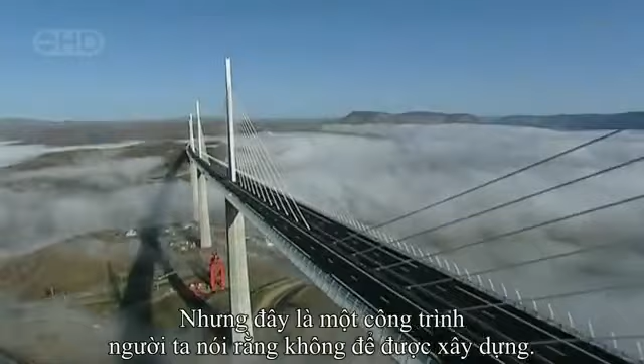This is the Millau Viaduct, the tallest bridge in the world. Its highest tower stretches a staggering 343 meters. So high, the bridge glides above the clouds. But this is a megastructure they said couldn't be built. When I've shown first the drawing of this bridge, they really thought I was crazy.

The team attempting to build this amazing freeway in the sky had to survive landslides, fight winds gusting at 130 kilometers an hour, and weather massive storms as the bridge simply hung in the balance. It's a bridge that pushes the boundaries of engineering to the limits, and then beyond.

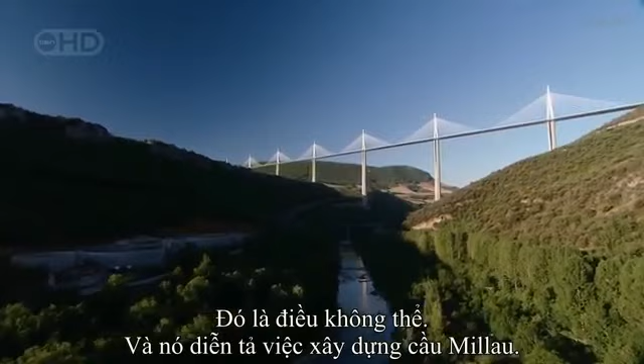Imagine building a series of Eiffel Towers, then slinging a 4-lane highway between them, all the way across one of the deepest valleys in France. Impossible though it sounds, that pretty much describes the building of the Millau Viaduct.

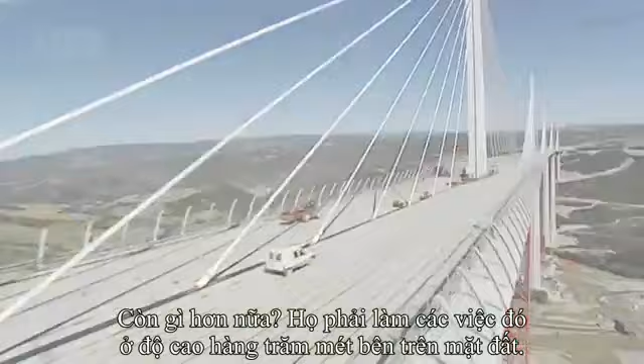From the start, the construction team faced 3 daunting challenges. 1. Build the tallest bridge piers in the world. 2. Put a 36,000-ton freeway on top of them. And 3. Erect 7 steel pylons, each weighing 700 tons. And what's more, they had to do this hundreds of meters above solid ground. So high that if you were on top of the Eiffel Tower, you'd still be looking up at this awesome bridge.

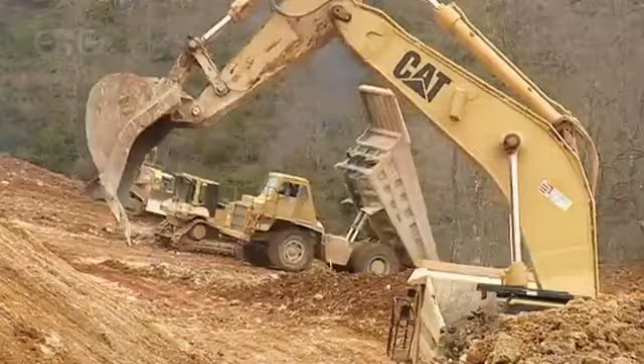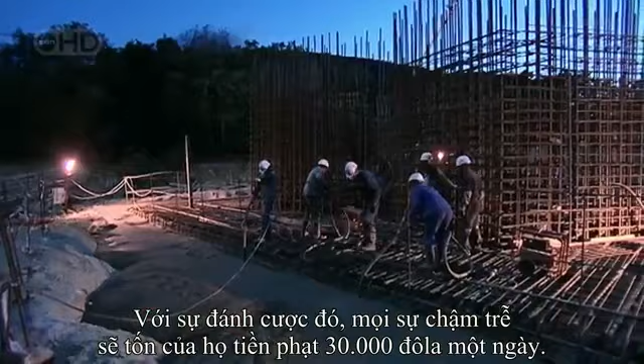October 2001, the team break ground. They're required to build a bridge that'll last for 120 years. And to win the contract, the teams promised to build it in record time, less than 4 years. By comparison, the world's longest suspension bridge, the Akashi Kaikyo in Japan, took a full 10 years to build. To up the ante, any delay will cost them $30,000 a day in penalties.

There are 7 piers that are numbered from the northern end of the valley. Number 1 will pose problems because of the steep slope. Number 2 will be the biggest challenge since it's the tallest. Crossing the river, number 3 is not much shorter. Then 4, 5, 6, and 7 climb the gentler slope to the south.

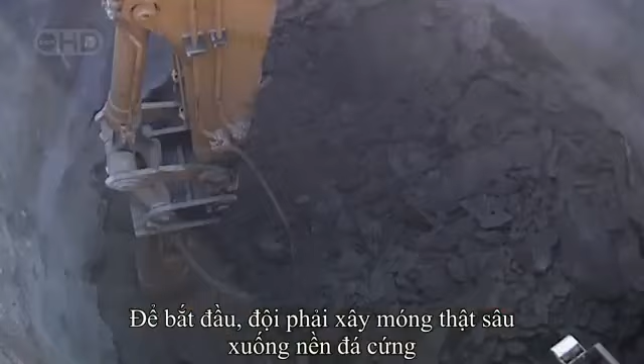To begin, the team had to bury the foundations deep in the bedrock in order to support the enormous weight the bridge will place on them. But the forces of nature were stacked against them. Geologists have warned of the risks posed by the region's fractured limestone. The rock is full of cavities that are essential to the local cheese economy. These cave systems, close to Millau, are home to a unique bacteria responsible for the blue mold in the world-famous Roquefort cheese. But what's perfect for cheese could be disastrous for a megastructure.

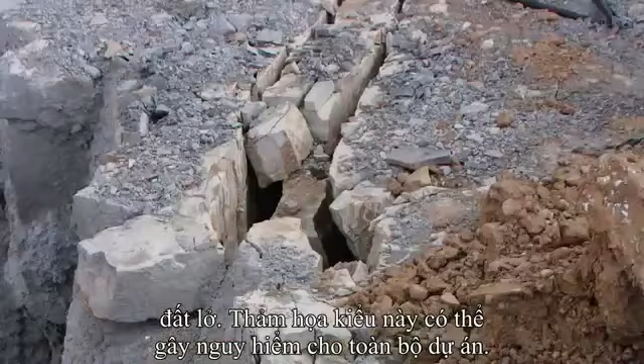The geologist's diagnosis spelt one thing: landslides. This kind of catastrophe could jeopardize the entire project. Despite the warnings, building went ahead as planned. Then, well into construction, as predicted, a dramatic storm causes a landslide. 4,000 cubic meters of rock collapse around Pier 1. Fortunately, the fallen rock doesn't damage the pier, but the warning is clear. They're forced to divert precious manpower and equipment to stabilize the slope and prevent a repeat collapse.

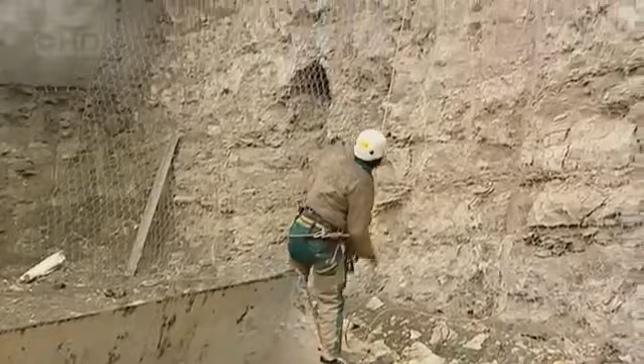So if the area is prone to landslides, why did they build the world's tallest bridge here in the first place? The answer is simple. In the 1980s, France built a freeway linking Paris directly with Spain. This major artery headed south across the French countryside, while from the Mediterranean, the freeway headed north, until they both hit one of the deepest valleys in France and stopped dead.

Welcome to Millau, France's least favorite bottleneck. The town of Millau is in the mountainous region of the Massif Central, one of the most tranquil parts of France. But in summer, this poor medieval town suffered traffic hell. The locals couldn't take it anymore. Neither could their mayor. It was terrible for our reputation. When you hear every day on the television and radio, avoid Millau, there's a traffic backup, a 5-hour wait in Millau.

And it's not just the people of Millau. Two drivers, Jamila and Jemima, crossing the 30-odd kilometers between the freeway on either side of Millau, reveal exactly why this bridge is needed. Jamila, in car 33, will cross the new bridge, while in car 22, Jemima will take the old road across the valley floor. Getting straight on the freeway, car 33 approaches the Millau Bridge after just 18 minutes. The only delay is the 30 seconds it takes to get through the toll booth. Then driving at 100 kilometers an hour over the spectacular bridge, she takes just 32 minutes to get to the other side.

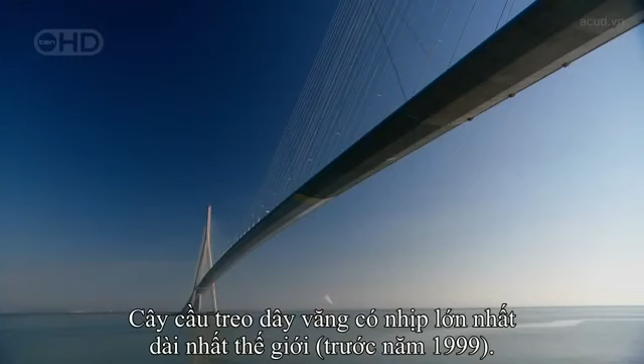12 years before construction began, up in Paris, the Ministry of Transport first came up with a plan. Their head bridge builder, Michel Virlogeux, is no ordinary engineer. He's a man who thinks big, very big. Like the Normandy Bridge in northern France, the longest cable-stayed span in the world. With this record-breaking structure completed, Virlogeux was on to his next, Millau. His plan, another cable-stay bridge, but pushing the technology beyond anything previously attempted, with piers 4 times higher than the Normandy Bridge.

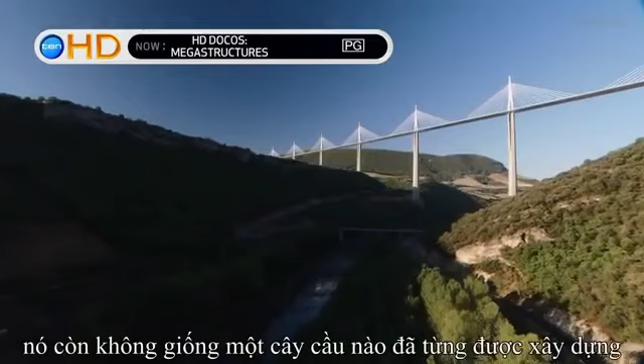The Millau Bridge would not only be the world's tallest, it would be unlike any bridge ever constructed. When I first showed the drawing of this bridge to the governing authorities, they really thought I was crazy. Virlogeux's Normandy Bridge has 2 sets of cables supporting the deck. But he wanted to up the stakes for Millau by losing 1 row of cables, so the remaining line would be forced to do twice the work.

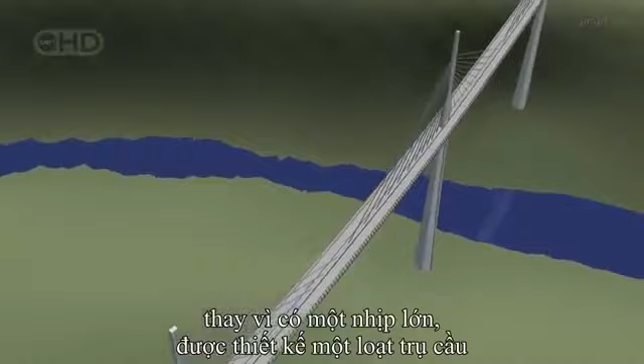More dramatically, the 2.5-kilometer Millau Bridge, instead of having a single main span, needed a whole series of piers to support it across the valley. No bridge builders had ever attempted a multiple-span, single-line cable-stay bridge on this scale before.

The French authorities had a problem. Nervous about Virlogeux's groundbreaking scheme, they held a competition inviting other engineers and architects to compete with different designs. The winner, Lord Norman Foster, is one of the world's superstar architects. In Hong Kong, he built the world's largest airport terminal. In Barcelona, offices literally hang from a mast on his communications tower. This is a man who regularly contemplates the impossible and delivers.

You know, it's the challenges, and it's one challenge on top of another, on top of another. And with Millau, one of the biggest challenges was making it fit into the landscape, given it's just down the road from the famous Gorge du Tarn, France's equivalent of the Grand Canyon. How do you make something which has to be so immensely strong against the forces of nature look very gentle, very delicate? How do you weave something on that scale into the most unbelievable landscape?

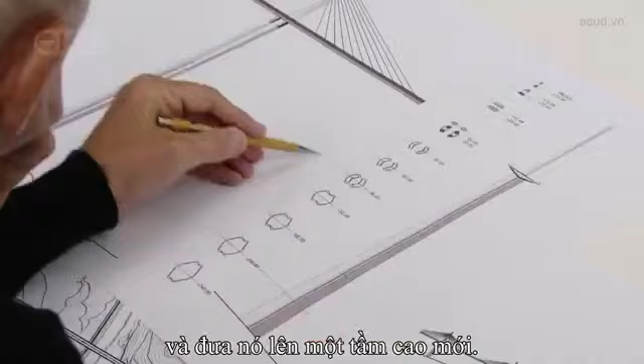Ironically, Foster's answer was to take Virlogeux's pioneering scheme, then push it one stage further. He turned an elegant piece of engineering into a delicate work of art by boldly cutting out 2 of the 9 original piers and seriously slimming down the remaining piers and road deck. Foster wanted the bridge to appear as delicate as a butterfly, but this butterfly has to support the weight of 5 Eiffel Towers in gale-force winds hundreds of meters above the River Tarn. Getting the design wrong would be a disaster.

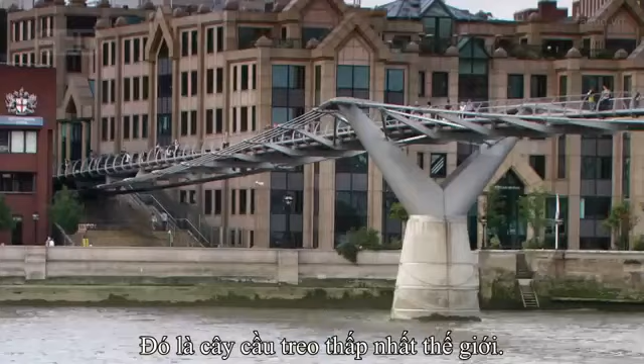Then, with Millau still on the drawing board, Foster's record as a bridge builder suffered a major setback. His Millennium Bridge in London is actually another record-breaking structure, the lowest profile suspension bridge in the world. But when this footbridge opened to the public in June 2000, it was a public relations disaster. Crowds walking over it set up a resonant frequency, and the bridge began to sway. As people adjusted their step to the small initial wobble, the effect was magnified.

Though it didn't threaten the structure, the swinging motion became so dramatic, the authorities closed the bridge for a refit that took 1.5 years and ended up costing over $8 million. It was a bad omen for the Millau Bridge, where construction was soon to begin. And at 15 times the height, a design flaw would be a catastrophe.

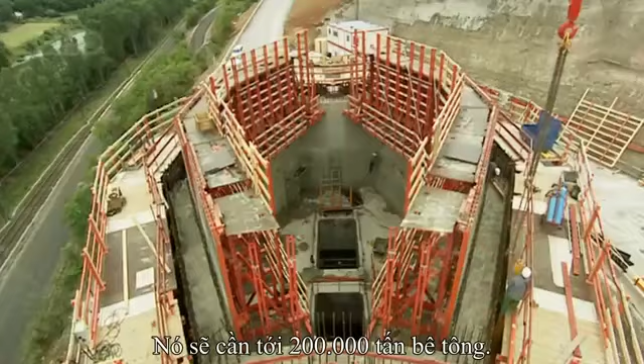December 2001, France's Millau Viaduct, the tallest bridge in the world, is under construction. Everything about this project is supersized. It'll need 200,000 tons of concrete, so much that the team have to build a concrete factory on site. But there's nothing straightforward about this concrete. The formula must be just right. It needs structural strength to support the massive loads it'll have to bear. But it can't set too quickly, as it has to be hoisted into position and poured hundreds of meters in the air. And it needs to be just the right color to suit Norman Foster's vision.

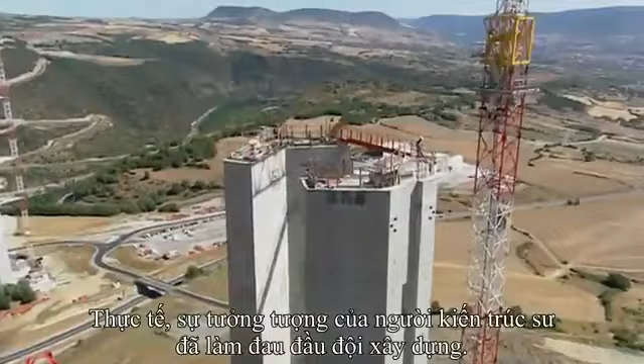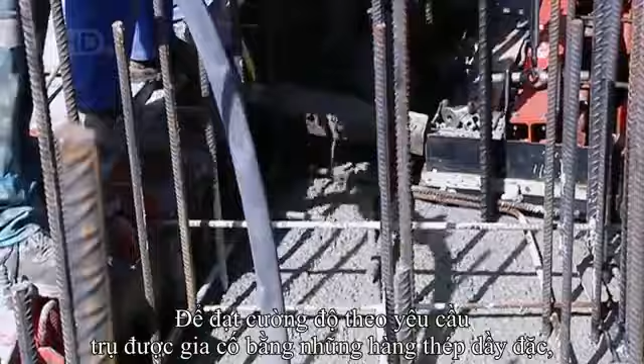In fact, the architect's vision has created a headache for the construction team. He's designed each pier as a complicated geometric shape, tapering the entire way up with vertical grooves set into them to create shadows. But what's just a line on paper for the architect was a major challenge to build. The enormous piers are built step by step by pouring concrete into a temporary mold. To give the required strength, the molds are filled with a frame of steel reinforcing bars. In total, 16,000 tons of these steel bars are hoisted into place and secured. Laid end to end, they'd stretch the 4,000 kilometers from Millau all the way to Central Africa.

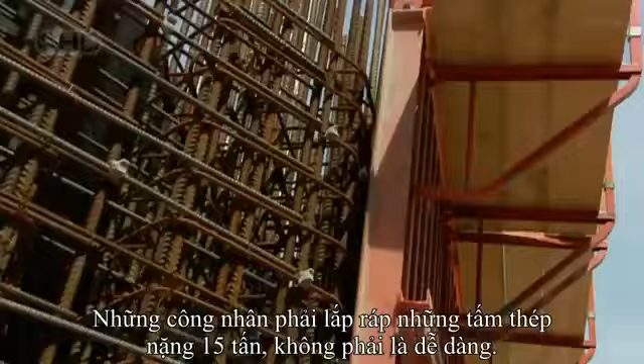The shape of each pier is seriously complicated. As a result, each time they remove the sections of red steel shuttering, they have to change the shape of the mold to fit the profile of the next 4-meter section. Manhandling these steel panels, weighing up to 15 tons apiece, is no picnic. And with the combined height of the 7 piers totaling well over a kilometer, they have to change the shape of the mold over 250 times.

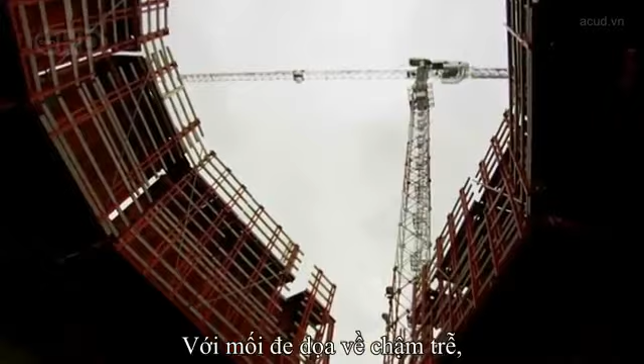Every 3 days, each team on each pier went through this whole cycle. Then they repeated the process. But it was a race against time, with a permanent threat of delay. Keeping the entire build on time and to budget was the daunting responsibility of one man, Jean-Pierre Martin.

If instead of 3 days we took 4, imagine that multiplied by the number of castings. We'd end up with a 3 to 6 month delay. With a penalty of nearly $1 million a month, this isn't something Martin wanted to contemplate. And this schedule wasn't his only headache.

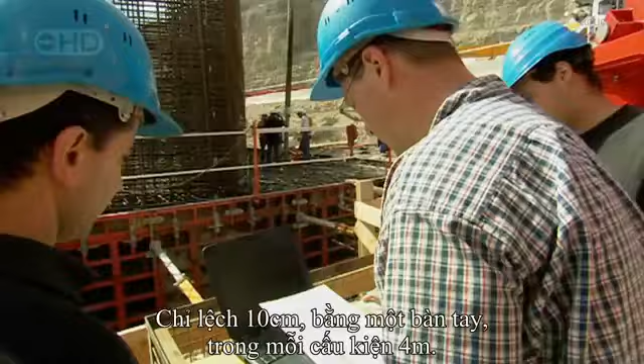You have to be pinpoint accurate when you're building the tallest bridge piers in the world. Get it wrong, and the bridge simply won't fit together. Just 10 centimeters out, about a hand's width on each 4-meter section, and the tallest pier could be 6 meters off at the top, the width of a jumbo jet fuselage.

Each team was aiming for a specific point in the sky. For Pier 2, this was exactly 245 meters above the ground, 546 meters from the north side, and 1,914 meters from the southern end. There was no room for error.

The only chance they had to get it right was with GPS, accurate to within 4 millimeters. Using signals from multiple satellites, the team could pinpoint their position and make sure they're on target for that critical point in the sky they needed to hit.

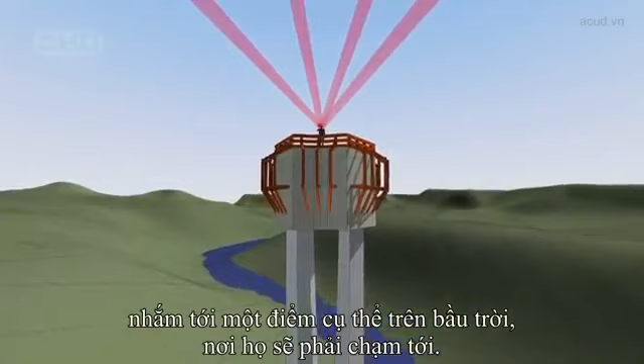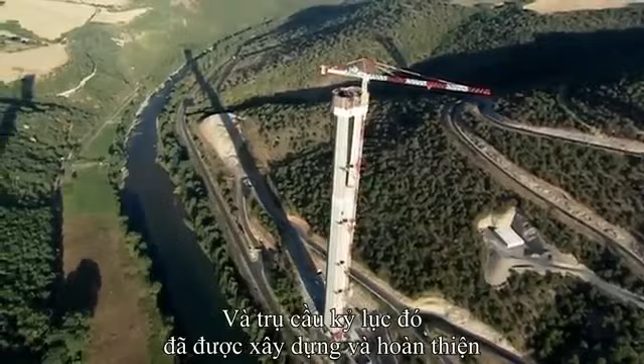Month after month, the piers climbed higher. Finally, by November 2003, they reached their full height. At 245 meters, Pier 2 becomes the highest bridge pier in the world. But is this record-breaking pillar where it's supposed to be? Amazingly, it's dead on target, to within 2 centimeters. Champagne corks pop. It's time for a major celebration.

Against all the odds, they were 1 month ahead of schedule, but the team couldn't afford to relax. The next stage of the project would be the most difficult part of the build. Phase 2 of building the world's tallest bridge involved putting a 2.5-kilometer roadway weighing 36,000 tons on top of the piers, a full 270 meters above the River Tarn.

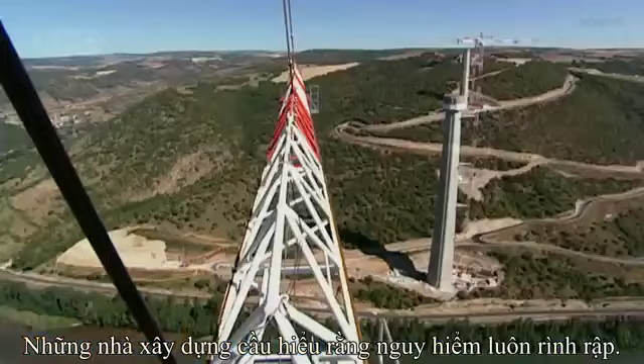Bridge builders know danger comes with the territory, but working at these heights can be lethal. More than 34 died constructing New York's Brooklyn Bridge. 35 died in 1970 on the Westgate Bridge in Melbourne, Australia. And 1 year later, 13 workers were killed when the Koblenz Bridge in Germany collapsed into the Rhine.

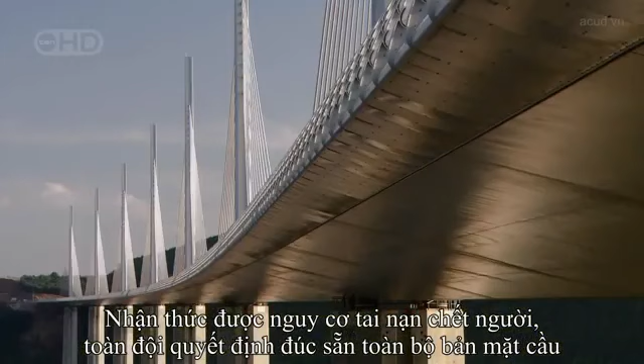With these fatalities in mind, the team decided to fabricate the entire road deck on the safety of solid ground. This meant building it in steel, which in theory would be much safer than lifting vast concrete sections hundreds of meters into position. There's only one problem with this plan. No one had ever put a road deck on piers anything like this height before, let alone over a 2.5-kilometer span.

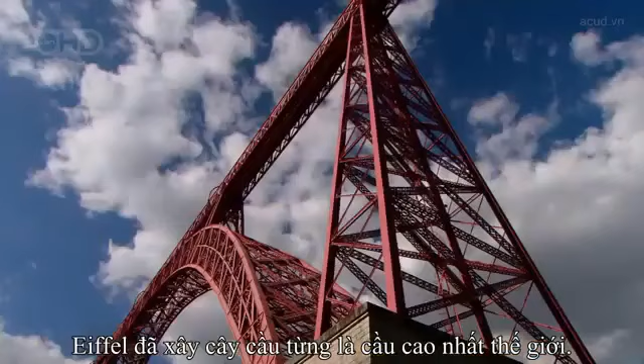In the end, only one steel manufacturer had the courage to take on this colossal challenge. Eiffel, the steel firm set up by the great French engineer. Eiffel built what was once the tallest bridge in the world, the Garabit Viaduct in southern France, before getting round to the framing for New York's Statue of Liberty and, of course, his signature tower in Paris.

But despite the company's experience, Eiffel's director, Marc Buonomo, knew he was taking a serious risk. It was a gamble for the company, because if there had been a mistake, if it hadn't worked, it would have been the whole company.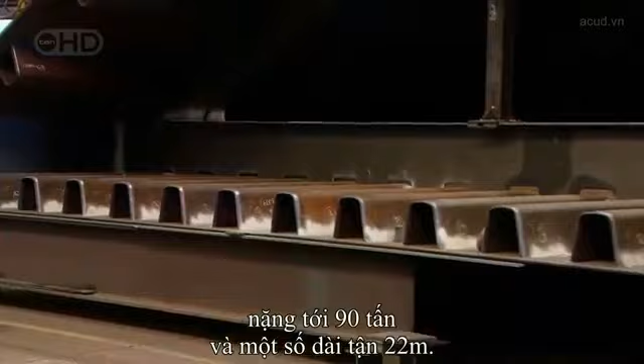They fabricated the massive sections that would make up the road deck in the company's steel factories. This immense jigsaw puzzle involved manufacturing 2,200 separate sections, weighing up to 90 tons, and some of them 22 meters long. Their accuracy is measured with a laser to within a fraction of a millimeter.

The huge square tubes are the central spine that should make the deck rigid. The triangular side panels will be welded on either side to create the width for a 4-lane highway. To meet the punishing schedule, Buonomo automated the manufacturing with a 2-headed welding robot and a plasma cutting machine.

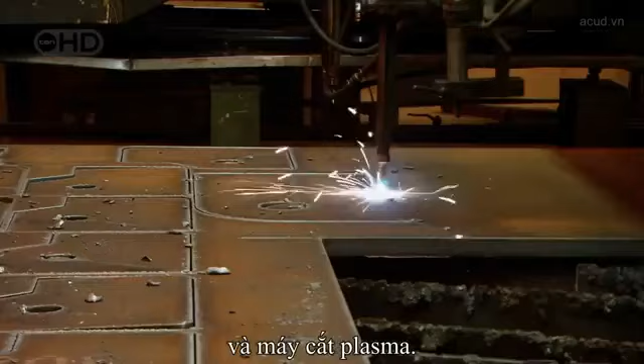Each cutting pattern or template is programmed into the computer. Then the machine automatically blazes its way through the steel. The torch reaches a scorching 28,000 degrees centigrade. That's 5 times the temperature of the Earth's inner core.

But cutting and welding was the easy part. The hard part was getting these monster sections the hundreds of kilometers from the factories to Millau. The routes had to be planned with precision to avoid major damage. The police coordinated safety and clearances.

Even with that level of preparation, some obstacles felt as if they're cutting it just too close for comfort. And this was no one-off event. To build the viaduct took over 2,000 of these extraordinary road convoys.

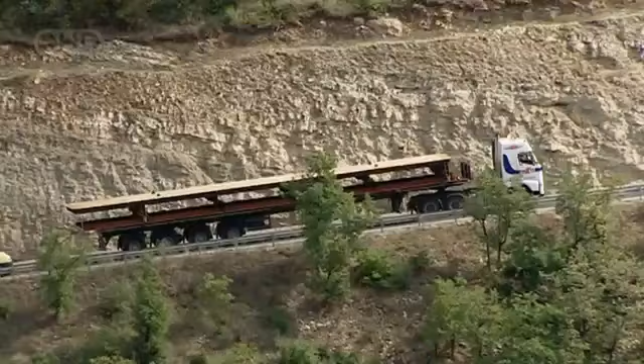The components arrived at assembly plants set up, one on either side of the valley. Here, the pieces of a massive jigsaw puzzle were welded together to form the 2 halves of the deck. But getting these 2 halves to span the valley on top of the world's tallest bridge piers would be a major challenge. They'd be the first team to put a road deck on a pier taller than an 80-story skyscraper.

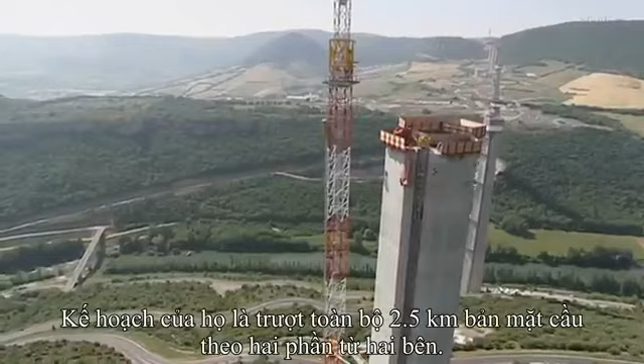And pushing bridge building beyond anything attempted before, they planned to slide the entire 2.5-kilometer road deck over in 2 colossal pieces. The bridge's chief engineer, Jean-Marie Cremer, was one of the few people who believed it could be done. All the engineers who know this method, who were in the know, didn't believe it was possible. If the team had got their calculations wrong, the entire structure could collapse into the valley.

We found a solution for the construction, which was to launch the bridge from the 2 sides. One part on the Larzac Plateau, one on the Rouge Plateau. And to push them from the 2 sides and to make them come and meet here above the River Tarn.

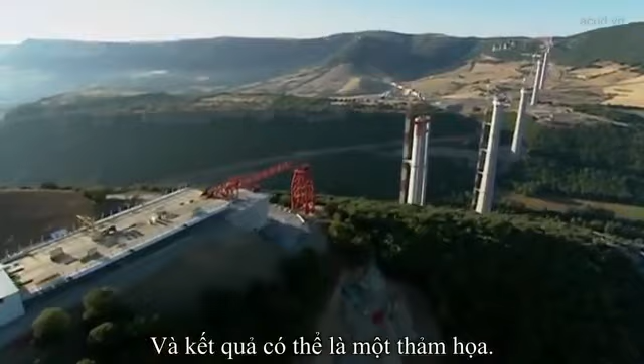Smaller bridges use a similar technique. A powerful set of hydraulic rams literally pumps the deck from one side to the other. But Millau would be the longest launch ever attempted over the highest piers in the world, and the results could spell disaster. The deck is so slender, it would bend and collapse if it were pushed out over the 342-meter spans between each pier. The furthest anyone's previously managed is less than half that distance.

The first part of the solution was simple. Fit a pylon so its cables support the front of the deck as it goes out over the valley. Then construct temporary steel support towers that halve the spans to a more manageable 171 meters. These steel towers were a construction feat in themselves. The largest, over 170 meters high, is the tallest ever built, and they needed to carry a massive load.

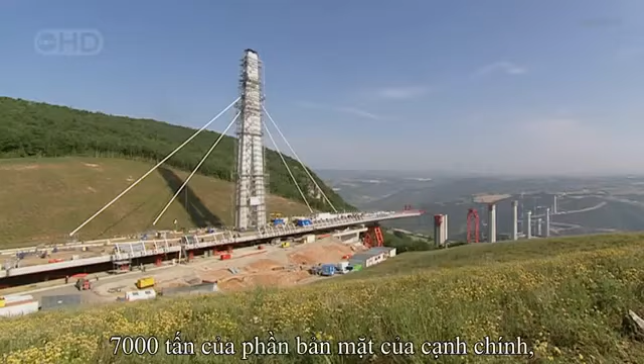7,000 tons as the leading edge of the deck, together with the first 90-meter pylon, slide over. And simply pushing this enormous weight over the top of the vulnerable piers would bring them crashing to the ground. This was the nightmare scenario. If we'd done a conventional launch, we would have knocked the piers over like the pins in a bowling alley.

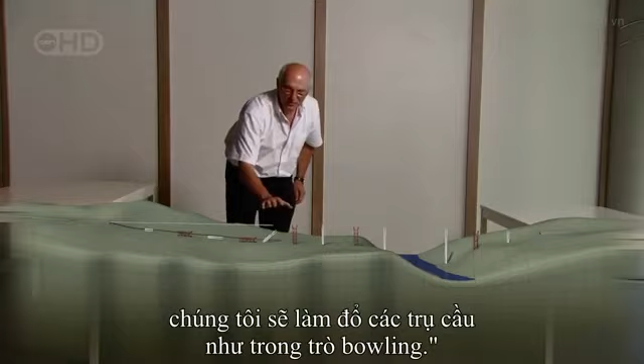Someone needed to reinvent the way this type of bridge is built. And it's Marc Buonomo with Jean-Marie Cremer who came up with the breakthrough. The basic principle can be demonstrated with a heavy box and a wobbly table. With a normal launch, you knock over the piers. I want to advance the deck over the pier, but if I push the deck from here, I'd knock over the piers because they're so tall.

The idea is to install a launching system on top of the pier, and that way, if I push the deck, it has no effect on the stability of the piers, and the piers won't fall over. The trick is to use a series of these launching systems to jack up the deck and inch it forward. Each system uses two wedge-shaped blocks under each side of the deck. The upper wedge is pulled forward by a hydraulic ram.

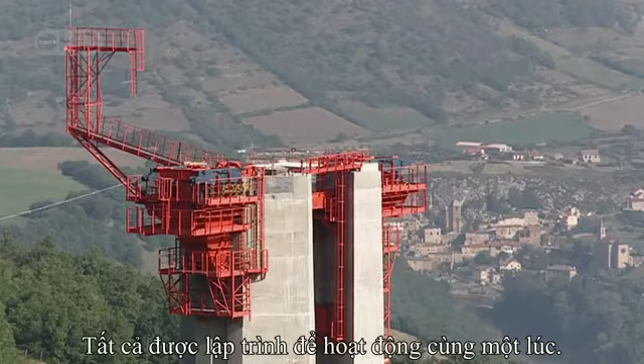It slides up the slope of the lower wedge, at the same time lifting the deck from its supports and advancing it 600 millimeters. The lower wedge then retracts, dropping the deck onto its supports. The upper wedge returns to its original position, and the whole cycle begins again. 4 of these clever devices are placed on each pier, all programmed to work at exactly the same time. The result is that together, they pick up the entire roadway and shunt it forward.

But if one fails or gets out of step, it could spell disaster. The force could push the bridge piers apart till they collapse. When you're up there and you see Millau 300 meters below you, you ask yourself, was this a good idea? The future of the entire project was now hanging on a prototype, and it had never been tested.

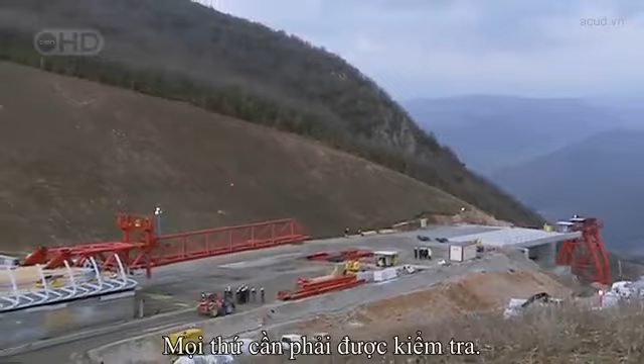It's the morning of February 26, 2003. Do or die day for the world's tallest bridge. Everything is about to be put to the test. The flexibility of the deck, the strength of the temporary piers, and critically, the pioneering hydraulic ram system. Even Buonomo, the man in charge of the launch, had his doubts. As it had never been done before, I have to tell you, I had fears that it wouldn't work.

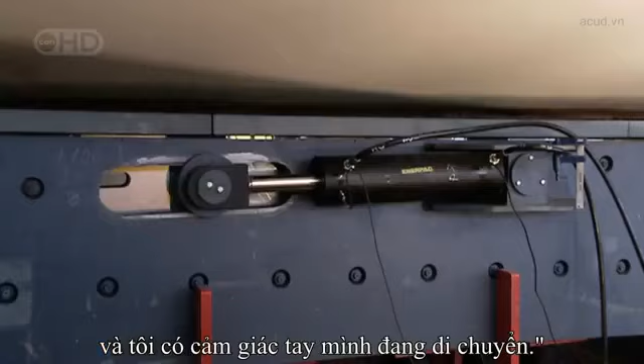The pumps kick in, the pistons start to push, and the deck begins its huge journey across the valley. The moment I heard the motors start, I put my finger on the deck, and I could feel my finger move. Every 4 minutes, the deck advanced 600 millimeters across the valley. Surveyors tracked its progress. But it was still a nail-biting time as they watched the unsupported deck crossing the void.

Eventually, the deck reached the safety of the first pier. 204 meters down, only 2,256 to go. The launching system seemed to be working as planned. The engineers were feeling optimistic.

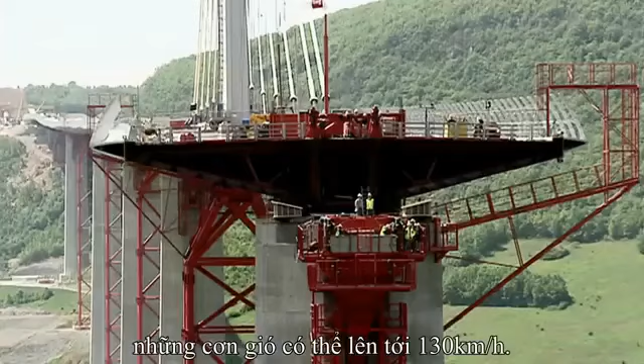But as the deck advances into space, it'll become more vulnerable to the wind, which can reach 130 kilometers an hour. Unfortunately, the road deck has the shape of an upside-down airplane wing, and the team's greatest fear is that this wing could simply take off.

The engineers kept a close eye on the wind and weather conditions. When they were satisfied there was a 3-day weather window and the wind wouldn't exceed 85 kilometers an hour, they'd give the construction team the go-ahead, and the deck launch could continue. The reason for this precaution is simple. Strong winds can literally tear a bridge apart.

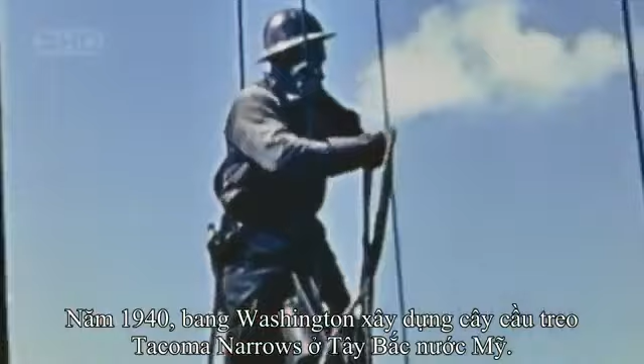In 1940, Washington State built a suspension bridge across the Tacoma Narrows in the US Northwest. It opened with a grand ceremony on July the 1st, but the celebrations were short-lived. The bridge had a major problem: the wind. Girders beneath the deck, designed to make the bridge rigid, actually blocked the wind, causing the roadway to ripple alarmingly. Locals soon dubbed it Galloping Gertie.

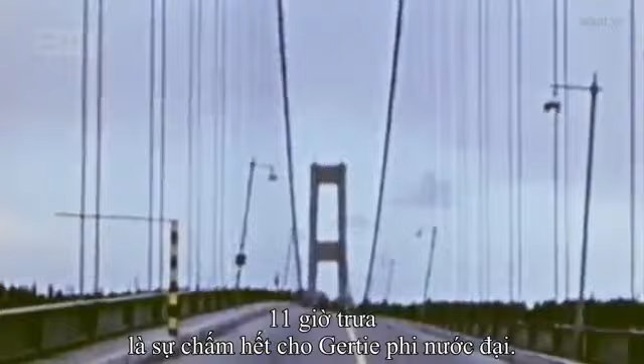On the 7th of November, with the wind less than 70 kilometers an hour, the bridge begins to twist violently. At 11 a.m., time runs out for Galloping Gertie. The wind sends the bridge crashing into the river. Wind tunnel testing is now standard procedure as a direct result of Galloping Gertie.

For the Millau Bridge, they analysed the wind in the Tarn Valley over 18 months, then recreated those conditions in the wind tunnel. Wind engineer Olivier Flamand was shocked by the results. The average wind speed was relatively low, but because there's such strong turbulence, it created very fast peak winds. The rugged terrain creates serious turbulence at the height of the road deck. Winds peak at 130 kilometers per hour. That's hurricane force.

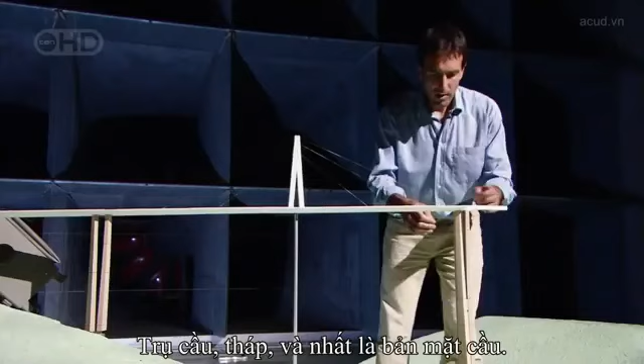They tested every aspect of the bridge to analyze the risks: piers, pylons, and critically the deck. But it's not just the aerodynamics of the finished bridge. They needed to find out how it would behave when it was most at risk, during the launching of the deck. Olivier and his team reached a chilling conclusion. The winds they've measured are strong enough to blow the unsecured deck off its supports and send it crashing hundreds of feet to the valley floor.

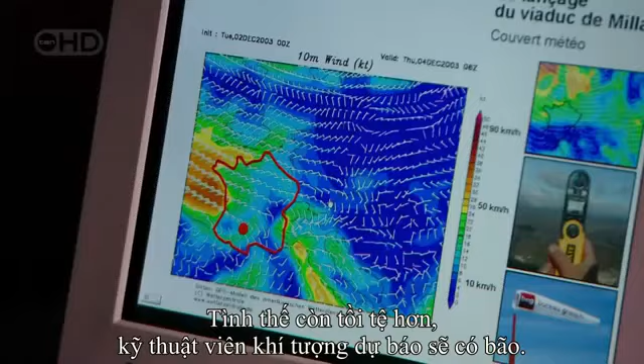And then the nightmare began. On the 2nd of December 2003, 6 months into the deck launch, one of the launch systems failed, leaving the deck hanging in the wind. To make matters worse, the weathermen were predicting storms. So far, these massive pumping machines had worked perfectly. But the fact is they were prototypes, and due to the frantic schedule, they'd never been tested.

The problem was that the non-stick Teflon between the sliding surfaces had ripped, and the friction generated was too much for the hydraulic rams to push against. Unfortunately, no one had planned on replacing parts of this monster machine mid-launch on the top of a massive concrete pillar. This was very bad news for the man who staked his reputation on this system. It was maximum stress, like poison in your mouth. You don't forget that.

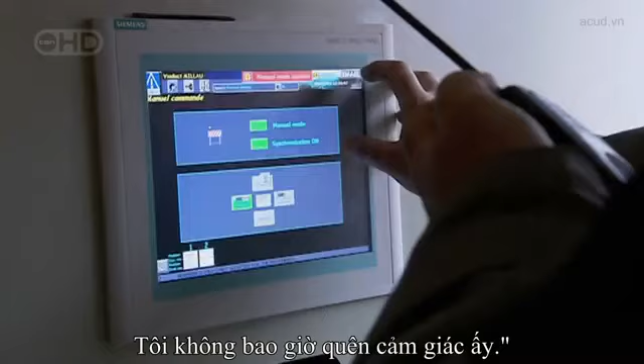Re-examining their calculations, they realized the cause of the problem. They'd underestimated the forces between sliding surfaces, but they wouldn't be able to repair it without the necessary spare parts. The clock was ticking, and Marc Buonomo needed a solution fast. When Apollo 13 came back with that incident, the NASA engineers requested they did the inventory of everything there was on board to know how to fix it.

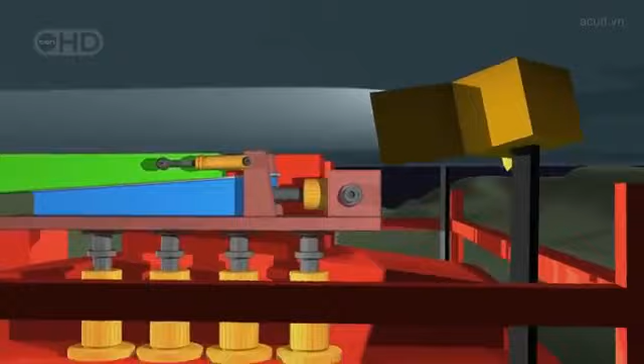The Millau team did an inventory. They realized that the other launching machines, not yet being used, could be stripped to provide the new Teflon surfaces they needed. Working all through the night, the team extended the access platform. This allowed them to take out the 5-meter-long, 2-ton steel wedges, replace the Teflon, and reassemble the launching machine. By 8 a.m. the next morning, it was ready to resume the launch.

The rest of the week, the predicted storms arrived, and another set of launching machines wore out. So when the deck finally made it to the safety of the next pier, the team breathed a major sigh of relief. You don't forget that. I won't forget that for 4 hours I was really scared.

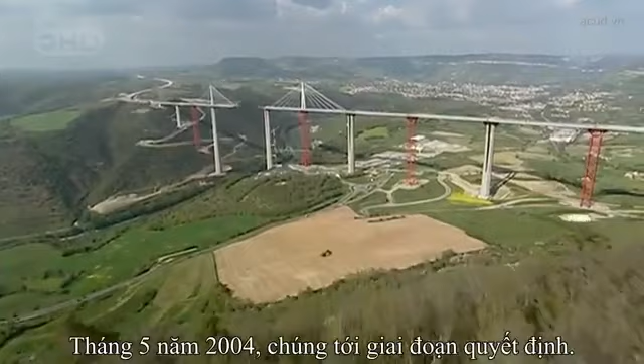The two decks continued their journey across the valley. Day after day, week after week for a full 14 months, they approached each other, millimeter by millimeter. By May 2004, they'd reached a critical phase. From the northern end, the shorter deck had traveled 717 meters into space to reach its final resting place. From the south, the longer deck extended over 1.5 kilometers. Only the section over the river, the one point where it was impossible to erect a temporary pier, divided them.

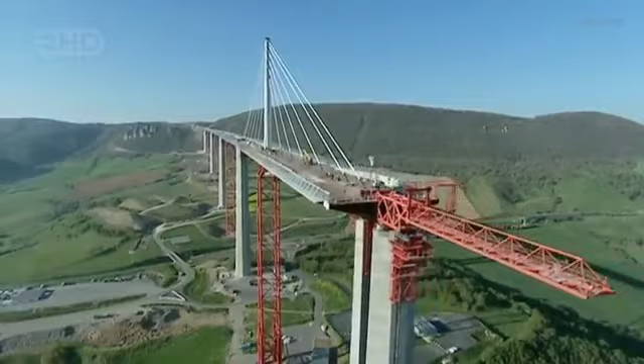But would they meet as planned? If they've got their calculations wrong, they'll have built the biggest white elephant in Europe. Even the man behind the whole project had his doubts. I was not convinced at all that the two parts of the deck could meet exactly with a perfect geometry.

The odds were against them. Calculating such a feat so precisely is a Herculean task. Firstly, the two starting points on the northern and southern slopes of the valley are at different heights. Secondly, the bridge has a subtle curve to it. As a result, each steel panel which makes up the road deck had to be cut and welded with extreme precision. It would be an engineering triumph if they got these two sloping curved decks to meet as required.

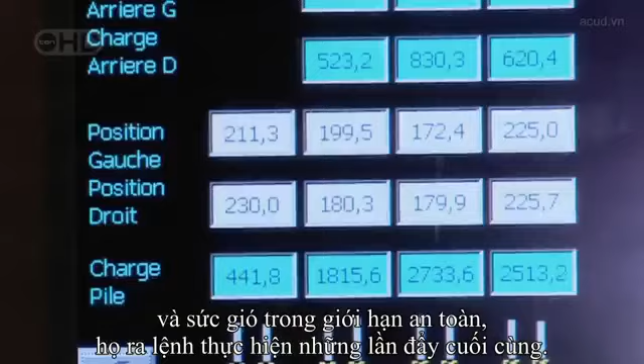The team checked the weather reports. With the wind inside safety limits, they gave the go-ahead for the final push. The rams began to drive the deck's leading edge off the safety of Pier 3 towards its destination. At this point, a total of 21 launching systems needed to move at exactly the same moment to avoid disaster. If anything were to go wrong now, the man responsible would be Marc Buonomo.

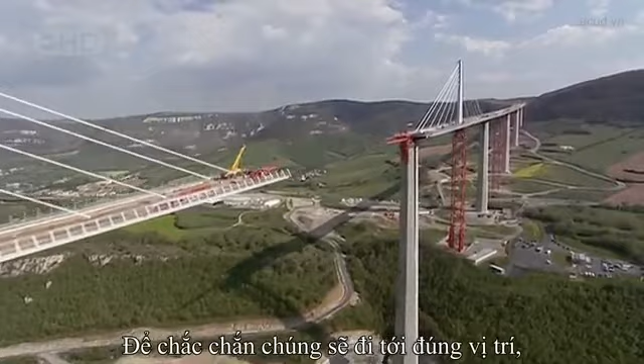Everyone asked me, how can you be sure that it will go straight? So to be sure that they were going to the right place, I had a GPS put on the front, so I could see the gap between the theoretical and the real position. Over the next 2 days and nights, the deck advances 600 millimeters at a time towards its final resting place. The world's media are watching the critical meeting of the decks. And to add to the pressure, the French Prime Minister is due to drop in to celebrate the event.

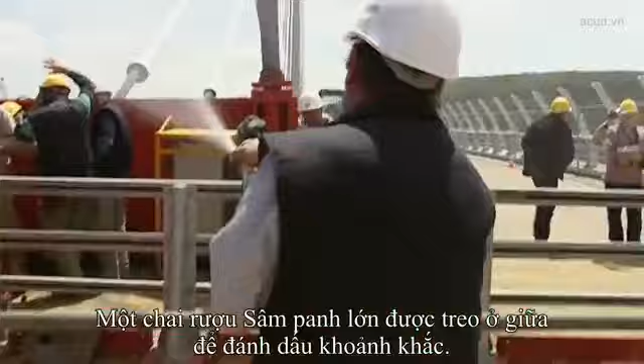The deck pushes forward, now with only centimeters separating the two sections. A magnum of champagne is hung between them to mark the moment. At last, union. The two massive steel decks have traveled high over this valley, a total of 2.5 kilometers, and when they check, they're aligned to within 1 centimeter. That's accurate to within 99.9999%. All the measuring, all the calculations have paid off. They've nailed it.

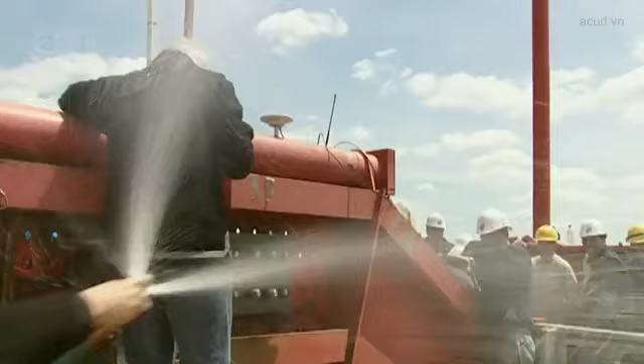The meeting of the decks was a special moment. News reports traveled round the world, and in Salzburg, Austria, they reached Felix Baumgartner, aka Felix the Conqueror. Felix has made a career base jumping from some of the tallest structures on the planet, and within 24 hours, he'd driven to Millau and was calculating the logistics for the jump, factoring in his two main aims, to avoid arrest and death.

Baumgartner waited for darkness before arriving on site. He found his way to the base of Pier 2, then climbed an access ladder the full 245 meters to the top. He entered the steel road deck and found a place to hide until daybreak. He had to remain concealed until the sun was high enough for his cameramen to record his world record attempt. At 7 a.m. the following morning, Felix the Conqueror emerged. He took a cool backward flip off the tallest bridge in the world and entered the record books.

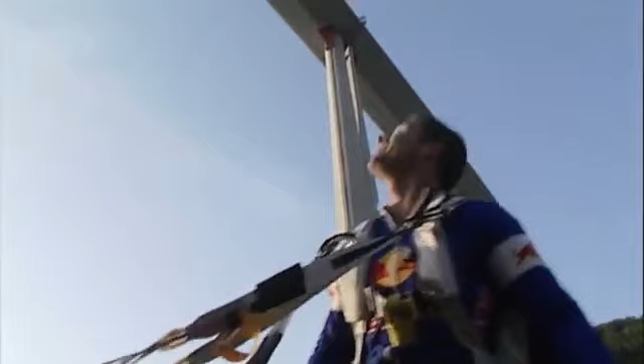The tallest bridge in the world, 250 meters. I did it. And having evaded death, he made sure he's not caught by the police.

The decks have been joined, and the team have reached the final phase of the project. But there was still a race to meet the schedule, and their problems weren't over yet. Everyone could see the dramatic undulations in the flexible steel deck. Even some hardened bridge builders wondered about its structural integrity. It was a huge surprise for everyone. All the engineers said, we knew steel was flexible, but not that flexible.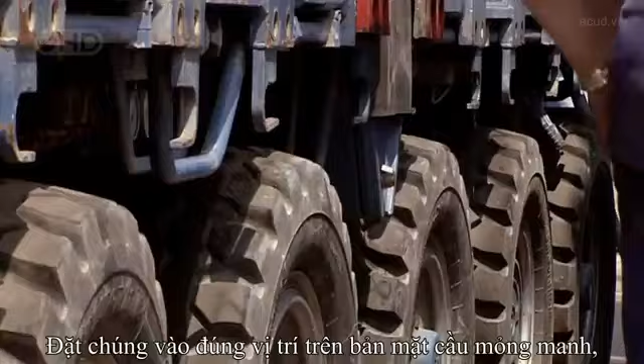The team were relying on the pylons and cables to pull the deck straight. Each massive pylon is 90 meters high and weighs 700 tons, the equivalent of 85 London buses. Placing them in position on the slender deck, high above the valley floor, would go beyond anything ever attempted. Once again, Marc Buonomo had a plan. You know, the first people to make vertical pylons were the Egyptians. Buonomo adapted a technique used in ancient Egypt to erect obelisks in the sands.

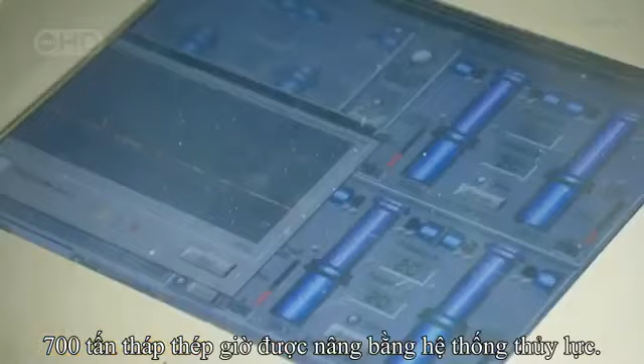On top of the road deck, the team put up two enormous steel towers, both of them secured by cables and equipped with a hydraulic system capable of raising 1,000 tons. The 700-ton pylon is then lifted by the hydraulics. As it rises, it pivots little by little until it's vertical. It's then lowered safely onto its anchorage point. Buonomo's 4,000-year-old technique worked to perfection.

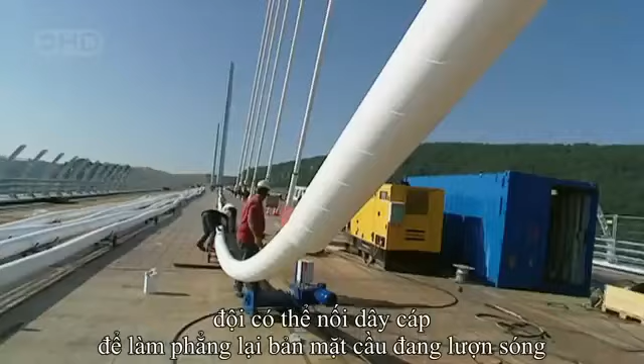With all 7 pylons in place, the team could attach the cable stays that would straighten the rippling deck and give it the strength to cope with full traffic loads. They hope. The weight of the roadway is now over 40,000 tons, the equivalent of a cruise ship, and the 154 cable stays should prevent it from sagging or collapsing. The strongest stays are made up of 91 individual steel strands and have a breaking strength of 25,000 tons, strong enough to hold back 25 jumbo jets, all at full throttle.

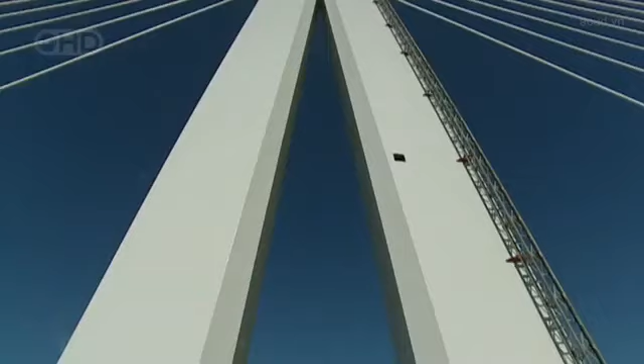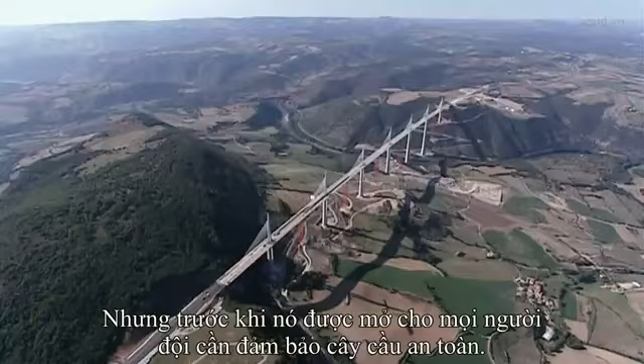As the cable stays are tensioned, true to plan, the ripples in the road deck are pulled straight. Over the 2.5-kilometer deck, the ripples are now no larger than the size of a thumb. They're finally on the home straight. The road surface goes on, adding a further 10,000 tons to the load. That's like driving 153 battle tanks onto the deck. But before it could open to the public, the team needed to know the bridge is safe. It would have to pass one crucial test.

After 3 years, the construction team building France's Millau Viaduct, the world's tallest bridge, are about to find out if they got their calculations right. On a single-span cable stay bridge like the Normandy Bridge, a large load on the main section is no problem because the cables are attached to solid ground and can't give. On the Millau Viaduct, with its 8 spans, the cables are attached to the deck of the adjacent sections. A load on one section will cause it to drop, pulling the stays down. As the pylons lean in, the matching stays are pulled upwards, lifting the neighboring decks and causing a dangerous rippling effect.

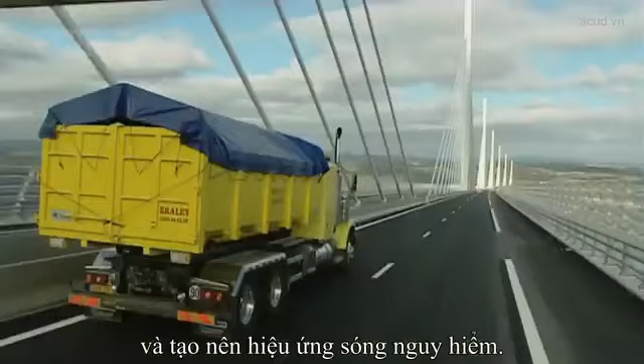It's right now the team put their bridge to the test. These 28 trucks have a combined weight of over 900 tons. They are now positioned in the critical point, mid-span. The engineers hold their breath. Measurements are taken. The span bends just 26 centimeters. This is a triumph for the engineers. The bridge was designed to cope with more than double that.

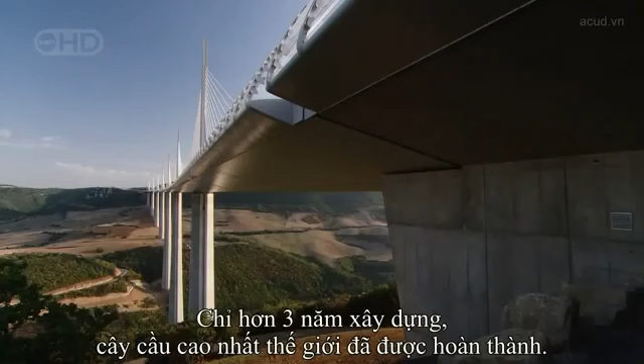4 weeks later, on December the 14th, 2004, President Jacques Chirac officially opened the Millau Bridge. A proud moment for the whole of France. Just over 3 years of construction have produced the tallest bridge in the world, designed to last at least 120 years. And against the odds, the project manager even brought the job in on time. But that's not what he's most proud about. What I remember, because on construction sites there are often accidents, is that we had no serious accidents, nothing more than a minor injury.

As soon as it opened to the public, the bridge was an instant success. But the real test isn't till its first summer, when the French all take their annual vacation. No one ever expected anything like this. Numbers peaked at more than 50,000 vehicles a day. At over $7 per car, that's great news for the construction company, who are clawing back their $478 million investment in the project.

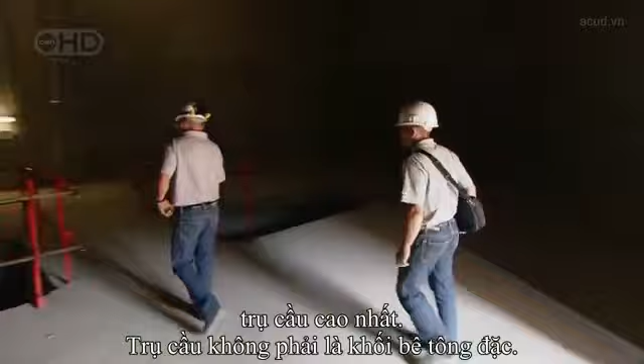This was an epic bridge to build, but it's just as epic to maintain. Thierry and Frank are assigned to P2, the world's tallest bridge pier. This structure is no solid concrete block. It's a series of vast hollow spaces. Their job today is to test the communication system and electric circuits on each of the 7 structural floors. This involves a 343-meter climb, going hand over hand up a ladder for the rest of the day. By dusk, when Thierry finally reaches the summit of the pylon, he may be exhausted, but there is a payoff. You get a fantastic view from here, a 360-degree panorama.

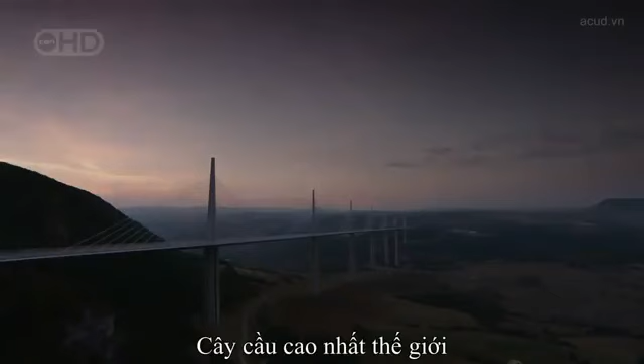The tallest bridge in the world has become an icon. But this is creating problems no one had ever imagined. Locals have been taking over the bridge as a platform to get media attention for their causes. This crowd was hoping that driving sheep over this freeway in the sky would help them get more farming subsidies. Jose's job is to prevent this kind of incident from creating a danger, and on this bridge, the incidents keep on happening. An alarm triggered by a motion detection system means there's a stopped vehicle on the bridge. Immediately, Jose dispatches a colleague to deal with the situation. The last thing anyone wants is a multi-car pile-up on a 2.5-kilometer bridge, quarter of a kilometer in the sky.

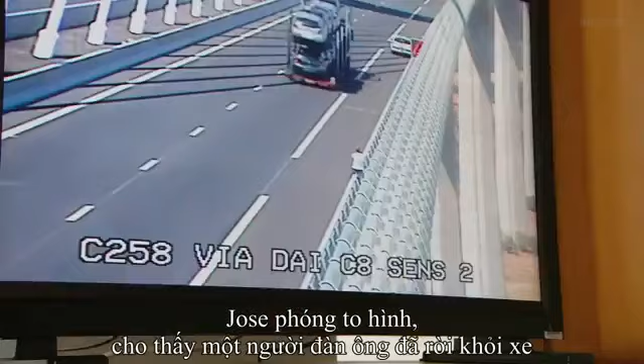Jose zooms in his camera to reveal the man has left his car and is sitting dangerously on the crash barrier. The driver's probably only broken down, but already one man who stopped climbed over the wind barrier and jumped to his death. Bruno intervenes. Thankfully, it's no more than an irresponsible photographer who's sent on his way.

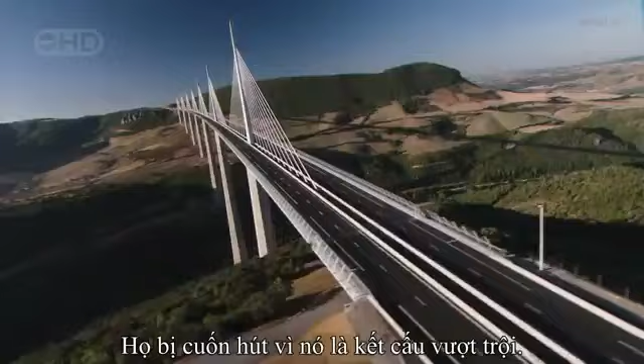You could say the Millau Bridge is a victim of its own success. It's definitely become a major tourist destination. 700,000 visitors in the first 9 months. Fortunately, most of them wait till they're off the bridge to take their photos. It's magnificent. I came 600 kilometers today to see the Millau Viaduct. There's only one thing to say. It's extraordinary. They're drawn because it's a world-beating structure, but also because it's incredibly beautiful, delicate and minimal. Not what you'd expect from a structure that's nearly a third taller than any other bridge on the planet.

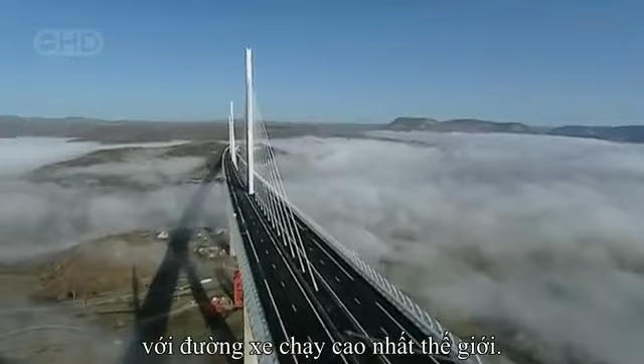And architect Lord Norman Foster's achieved his aim to give the driver the sensation of soaring. As you leave these plateaus, you do fly. You fly across this bridge. Literally, you are above the clouds. And the result certainly pleases the man who dreamt it all up. To see erected this bridge, which I imagined 15 years ago, it's something magic. This is the longest pure cable stay bridge in the world, the tallest roadway in the world, and of course, at 343 meters, it is the tallest bridge ever constructed.